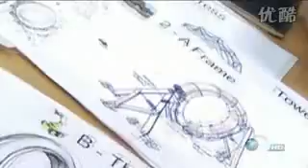As soon as they sit down, the prototypers are presented with option after option after option, till finally they see one that they think will work within the 2-week time frame.

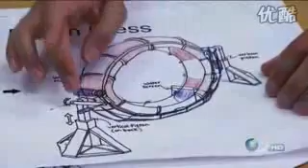It seems like the bench press really is the way to go, but there are some big questions. How big are these members going to have to be? How's the donut going to actually hang, too? We're actually a big fan of putting the truss up top.

They've got the design sketch down, but clearly details are still a long way off. All right, well, it seems like there's a lot of work to do. We'll get to sourcing, hydraulics, and steel and all that. Your job, design the entire thing. Make sure it's not going to break. We'll be back tomorrow.

With the design plans taking seed at Acorn, the guys have to do their simulation homework. So they jet over to NASA to get a first-hand look at a state-of-the-art flight simulator used to train astronauts and test pilots to fly.

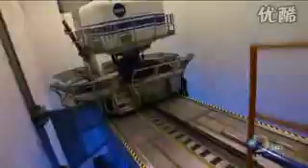Has anyone ever ridden this while you were warming up? It can shift 40 feet horizontally and rise and fall a staggering 60 feet inside its hangar at speeds simulating over 7 Gs. This motion works hand in hand with the simulator's video projection to make a test pilot feel exactly like he's flying an aircraft.

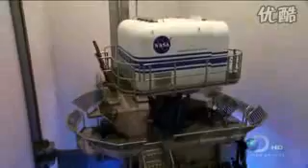Anyway, we can take a look around. Oh, yeah. To create the G-force necessary for accurate simulation, 12,000 psi hydraulic pumps are employed.

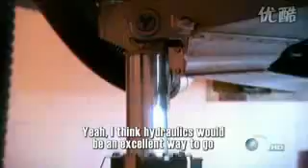So do you think that would be a good way for us to go, to use hydraulics in our motion simulator? Yeah, I think hydraulics would be an excellent way to go. While this massive amount of power will dwarf what our prototypers will need, the principle's just the same.

The controls for our simulator is Zaz's part of the build. Oh wow, and it looks like hydraulics are the way to go.

So it's time to get a closer look at the simulation. So do we get to ride this thing? Yeah, we can raise it up. Joe wastes no time jumping into the cockpit and tries his hand at landing the mock helicopter on the moving aircraft carrier, with mixed results.

You're landing on the water there. Let's try this again, sorry. At least I almost made it to the ship that time.

Even though he's not the world's most natural pilot, the simulator works so well that Joe feels like he's actually flying. From the controls and the visual stimulation and the movement of everything combined together, it feels like I'm in a helicopter.

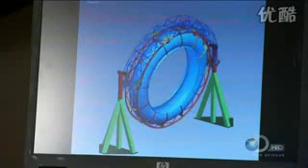After their airborne education inside NASA's flight simulator, the next day they head back to Acorn to see the finished 3D computer model for their water slide simulator prototype.

What's up, guys? Hey, guys. Good, we heard you had a design for us. Yeah, you guys. Oh, that is awesome. Oh wow, check it out.

The bench press design they've chosen has 3 main sections: upright columns to support and stabilize the structure where hydraulics are mounted.

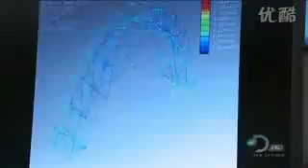A fiberglass and steel donut where the rider sits, and the truss that swings the donut 15 degrees in either direction as it spins inside. We can really start to see it take shape here.

But after seeing the final design in motion, the all-important question remains: how big will it be? This thing's 27 feet in diameter and weighs around 9,000 pounds. The spinning donut and truss alone will weigh 4.5 tons, not counting the upright supports. It's a lot of welding.

It's a lot of welding. Yeah, all right, thank you very much. Hey guys, thanks a lot. It is just going to be so great. We just have one small issue, we just have to build the thing.

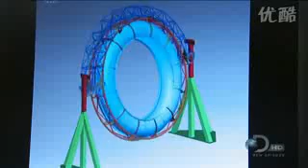With literally tons of steel needed, that small issue could be a big problem. So they need a trusted ally. But Joe Andreas is a commodity in high demand. A veteran special effects technician of his magnitude makes him a hard man to catch. Get him! Get him! So once the guys have him, they're not going to let him go.

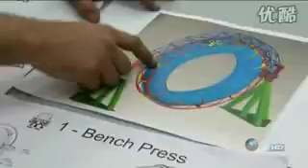This is a big, complex project, and there's a lot of things going on everywhere. And one big piece of the puzzle is the whole mechanical structure. So we need to hand that piece off to someone that can just take care of it. We don't have to worry about it.

The guys have a quick meeting to get Joe Andreas up to speed. How tall is it? Probably 30 to 35 feet tall. But it's light, that's the good part. It's only like basically somewhere between 7,000 and 9,000 pounds. So what do you think?

Well, that's interesting. With Joe Andreas suitably shaken up, a special delivery arrives downstairs direct from Splashtacular: over a ton of fiberglass tubing for the inner ring of the slide. And it's definitely an eye-opener. It's big. I don't even know if it's going to fit in this room.

The 24 fiberglass sections will get bolted together to make a 27-foot diameter donut. As the pallets are offloaded, the prototypers only now begin to sense the scope of what they've undertaken. This might be our most ambitious project yet. This project is so big that we can't afford any extra work at all. Any slip-ups are going to be very costly.

It's overwhelming to even just see these fiberglass pieces, to think about having to build the entire support structure and a computer control interface to actually move this thing. Totally nuts. I don't know what we got ourselves into.

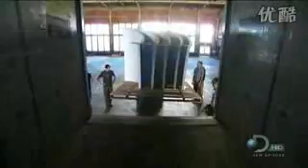Despite their original idea, there's no way this machine will fit in a backyard. It might not even fit in the warehouse. That compact simulator will have to wait for future versions. This fast-track build is just for proof of concept. I don't even know if this room is going to be big enough for this project that we have now. With the scale of this simulator growing out of control fast, the guys just want to run and hide.

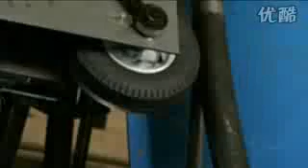The wheel in the sky isn't turning. I don't know where I'll be tomorrow.